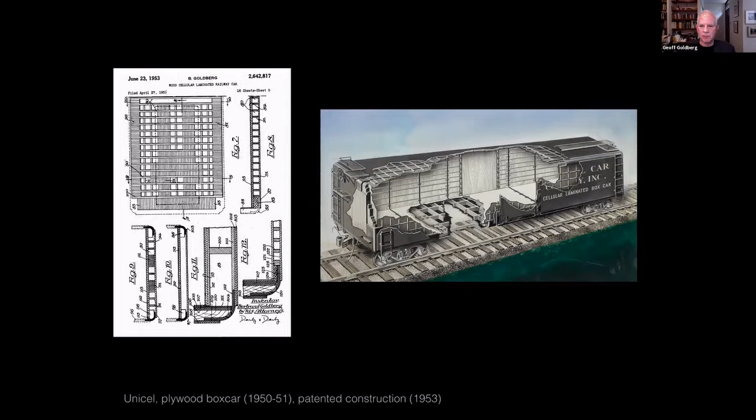So again, there's exploration in technique going on through these furniture experiments, if you will. They were working tools for him.

The first of his three-dimensional curved buildings is a project proposal in 1956 for a recreational center down in Alabama. It's got these kind of doily leaves for roofs, which we did not understand or give much import to until just a few years ago, when more careful looking at the archives revealed the working drawings for this, shown on the bottom.

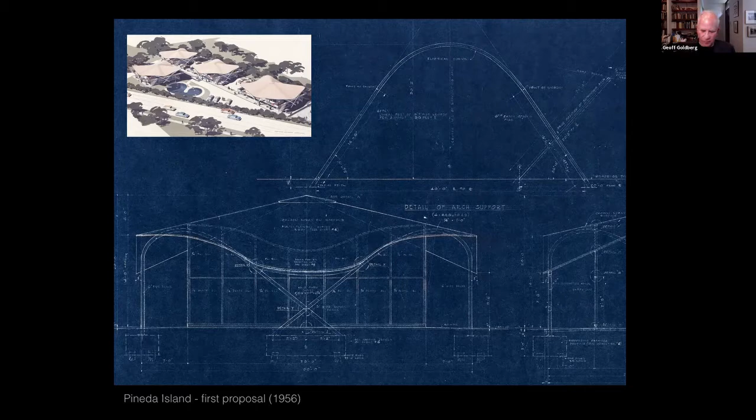You may see, I don't know if you can see clearly, but there's this sort of curved piece you can see on the top one. It's a pipe, a 3-inch pipe. Well, what's that all about? We actually went through it in some detail, and the sequence is shown on the upper left side here.

You take a curved pipe on the ground and you bend it. It's roughly a 7-centimeter pipe. Then you tilt it up at 45 degrees and you stick it in the ground. You do this 4 times, and then you fill it in between them with the red lines in the second drawing. Then you raise a center post and loft, if you will, from that out to the perimeter, and there you get your wobbly doily shape. It's a rather interesting notion.

One of the differences between Europe and America is that we're far more stingy about labor costs. Labor tends to be high cost here, and so he was always interested in how do you get away from handcrafted and industrialize this. You can sort of see that process here. This project did not go ahead.

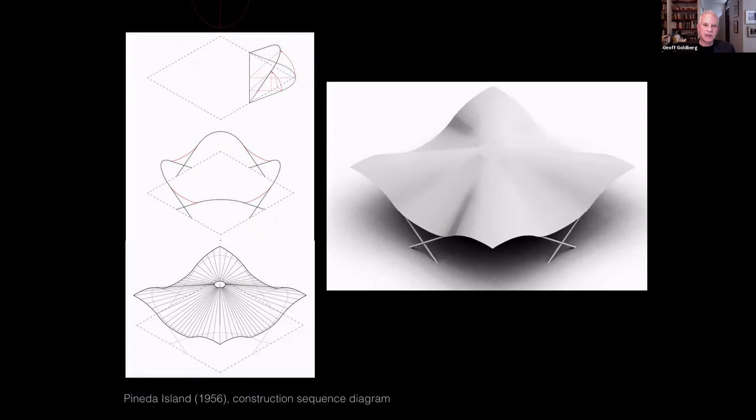The one that ultimately put him on the map was Marina City. Here's the elevation drawing for this. It has a very unusual development history, which is beyond this talk, but I just want to say that his tallest built work before this was a 3-story house. These are 60-story concrete towers, which were the tallest in the world at the time they were built. He had no right, if you will, to this commission. He managed to tumble forward in a very unusual way. That's a story for itself.

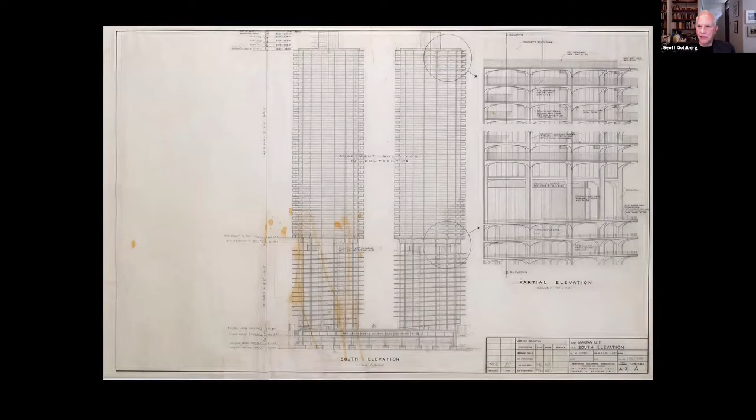I want to talk about a detail in Marina City, in fact, a few details, which has to do with this perimeter column. People have a very hard time understanding Marina City because it is technically innovative, iconographically unusual, sculptural, and yet also functional. It's a very strange combination, and it's not easy to get a handle on.

One of the problems people have is addressing the resolution of Marina City, and part of it is the fine grain—that kind of Mies approach. We're either doing the big box or doing the corner detail, so it doesn't work at the middle scale. It's in the detail. Here is a detail of one of the perimeter columns. It is under the parking ramps, and if you'll notice, that's a rather unusual shape. It's actually a very provocative shape.

A few years ago, I started to look into this a little bit more in detail. The balconies shown on the left here during construction, without their railings, are actually quite large, and they have these side haunches as the perimeter beams come down to meet the column. You can see it in the drawing on the bottom right. This is not a working drawing, it's actually a structural diagram on the top showing what's going on at the column. You'll notice the column shape is unusual—it's a trapezoid with its ends cut off, so it's an 8-sided column, if you will.

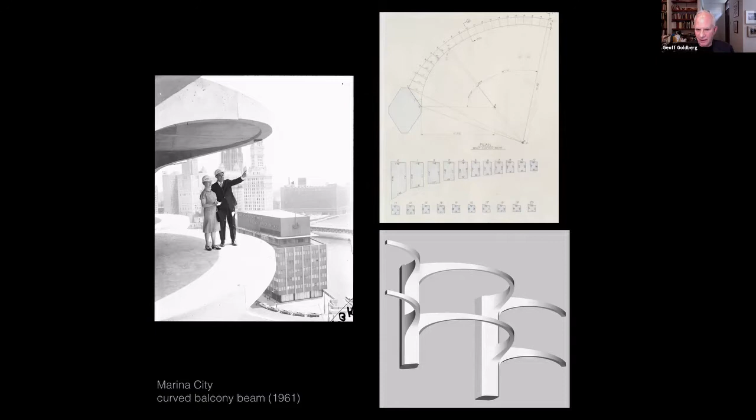If you start to investigate that column more, there's a few things that are interesting. First, how could such an unusual shape be economical? Marina City was built at the cost of public housing, which is staggering, so the question is, how could you possibly do something this custom? Under this notion of mass customization, back in 1960, they developed a fiberglass form, which they reused. There are 18 of these columns per floor, times 60 floors, times 2 buildings, so they were able to get their use out of them.

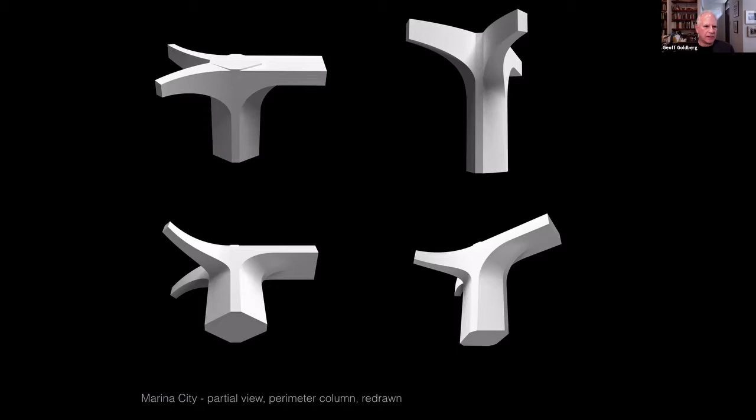Between the two balconies, there's a flat face in the upper right. In the bottom right, you'll see that internal flare within the apartment as it returns to become a structural beam that goes back to the core. It's a very unusual shape, and it's been pulled out of the building, if you will, to look at it on its own.

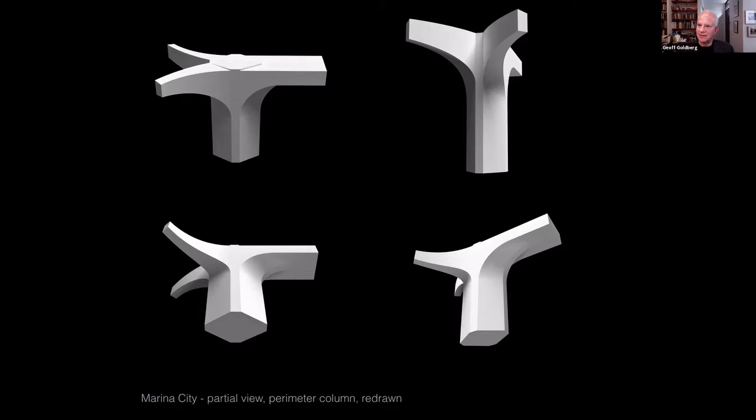This got me thinking, where does this come from? This is not Mies. This is not easily predicted from any part of his experience. How do you get to this? That's an interesting question, at least I thought it was.

How did he get to this? And of course, he's not here anymore. He's been dead for 25 years, so it's hard to ask him. And I started poking around a little bit further.

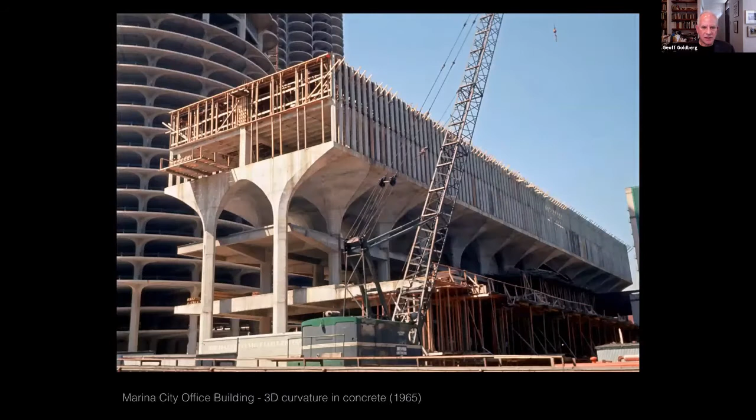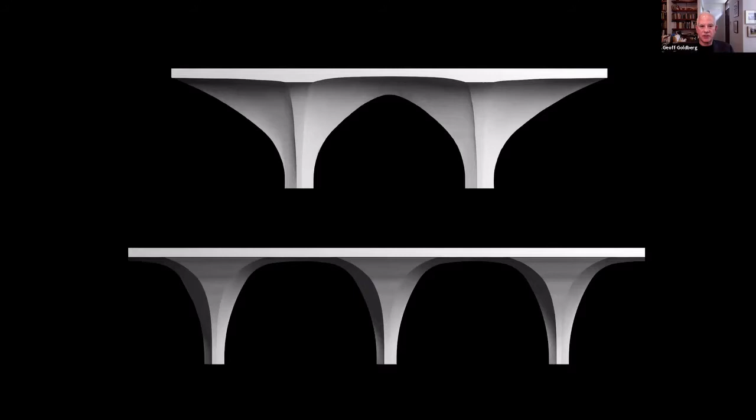So we decided to try to understand how they had been drawn and how they had been engineered. We developed a very complicated three-dimensional model of them and found that the sections between north and south and east and west are in fact quite different, not just a simple set of relationships. We made a physical model, and this is a Rhino version of it, upside down, but you can see that roofscape is really quite complicated.

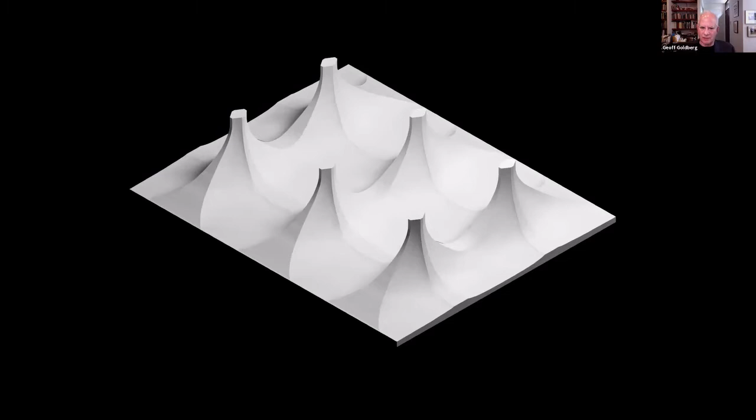And it starts, of course, with, well, why don't we take that trapezoidal column and use it over here? And why don't we just flare up? Well, of course, the geometry off that trapezoidal column is actually quite complicated. If you go back to the drawings and look, both sets of sections are what I call tri-arch radiuses - an engineering approach where you use three different radii to approximate the curve. It's a very complex curve.

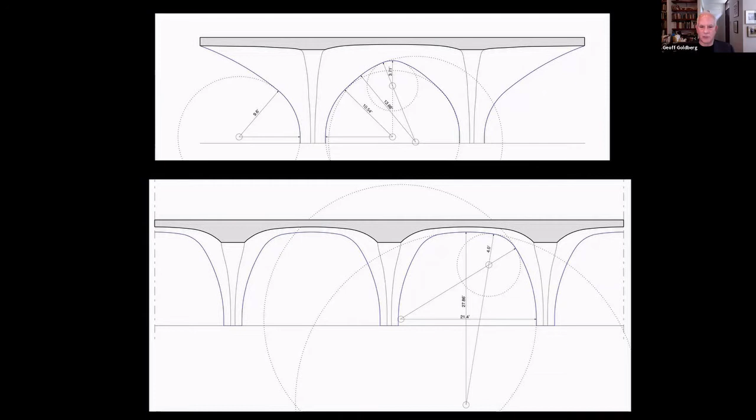In a sense, at the end of the day, these are Gothic. These are not industrial. These are an effort to make in concrete what was being made with stone and lath in a Gothic cathedral. I think that's kind of curious, while he's working on an industrial project, to have this kind of comment.

The next project I wanted to bring up is the Brenneman School, where these concrete shells were done. It's designed around the same time as Marina City. And unlike Candela's work or other work dealing with shells, these are intimately scaled - one per classroom. The idea here was to get north light through the clerestory and be able to stack these up close to each other so you could get 24 classrooms on one floor.

And still have light, even though you couldn't have side-to-side light. There were issues with these. They did them sort of as a monolithic pour. I think there were cracks, there were leaks. The whole thing has been covered in a big steel box, so you can't actually see them unless you manage to go up into it. But they're really quite interesting when you look at their history.

Well, what's going on is that those are 1.5 inch, or what we might call 4 centimeter, steel channels that are bent, much like that pipe we saw before. And they span from one side to the other, and then reinforcing is put between them, and then mesh is put over that, and then it is sprayed. So these are not handcrafted with molds in the same way that you might see it like a Candela project.

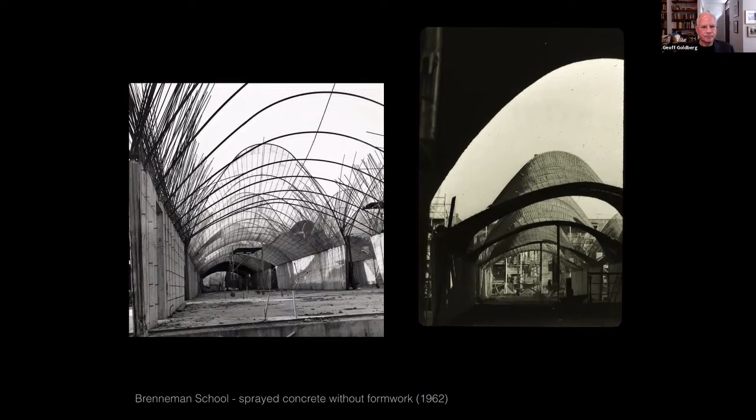Going deep into the drawings, there's always been a mystery about this project, because my father in his oral history always refers to it as kind of an arch-like construction. If you go back and look at this, I can't understand this arch-like notion. It makes no sense—these are shells. Well, it turns out they played a trick here.

They made these individual pieces of channel. There are, I believe, 10 of them, and they are of different sizes. Here's the whole progression of them, placed roughly 4 feet, or a meter 20, apart from each other. And they are serving as arches.

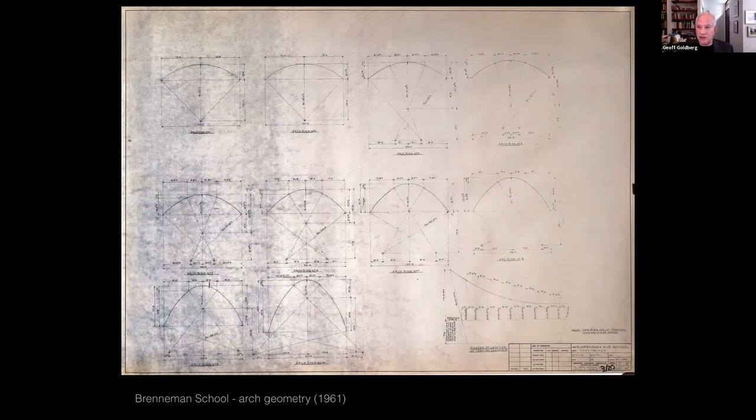If you go deep into the papers, you find out they actually calculated it as a hyperbolic paraboloid, and then they also drew it as these arches approximating that. So the construction side dominated over the pure form, even though they're very close—there's like 1 or 2 inches difference, a very little difference. So that's kind of interesting. And here it is—if you model it, this is what they're doing with these arches.

So now this is our third technique. We had the doily, if you will, from Pineda Island. We had the sort of Gothic. We had also the columns at Marina City, and now we have this one with these arches. So already we're seeing a nimbleness about construction and about techne.

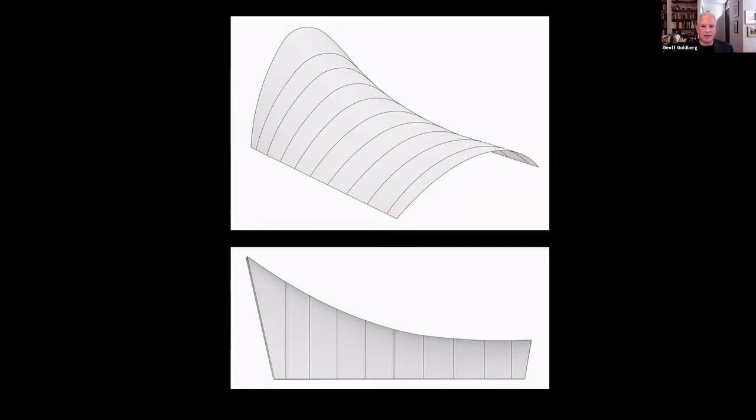The last of the three-dimensional curve approaches in buildings I want to draw attention to is the ultimate solution where the office went, which is they got out of these complex curves and into something called blockouts—they would take an extruded shape and block out, making openings into it. These are geometrically complicated because they're curved in a bunch of ways, but they're very easy to make, quite simple. You just have your wall form and you block out a certain section of it, and it makes for very dramatic space.

So this is where the sensibility is beginning to dominate over the notion of technical inventiveness. They found an answer, and ultimately they use this answer in all their subsequent projects.

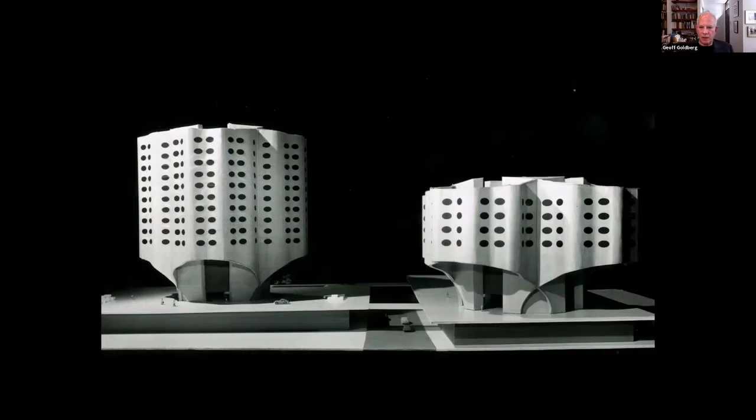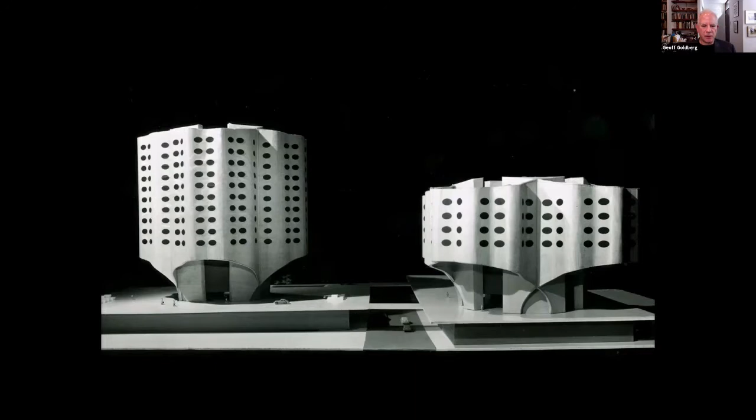The office moves into a number of hospital projects, and this was a proposal for one that did not take place, but the plan form comes from a notion of patient clusters, where the outboard bathrooms make the kind of bumps in the exterior wall. So it's kind of a shell structure up above, but notice the way it comes down to the ground—it is essentially blocked out. They just take the extrusion and delete a whole bunch of it and tie it back to a central core. And they used this approach in many different hospitals.

These are different layouts that they did. You'll notice, for example, in the upper right, the Brigham and Women's, you can see the way in which the patient cluster is divided up into bedrooms. In each one of these, actually, you can see the bedrooms.

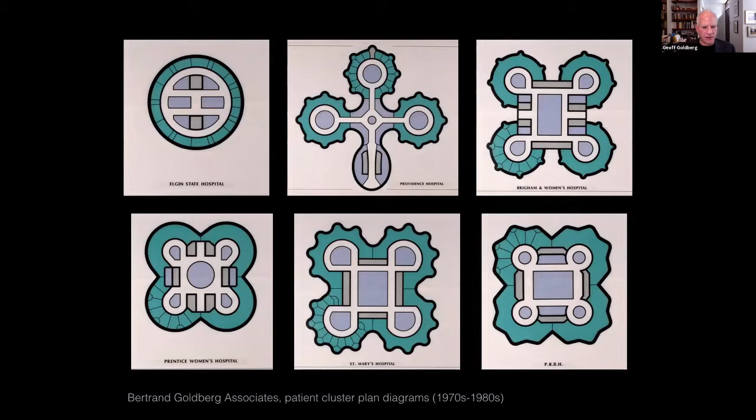And I want to draw our attention to Prentice on the bottom left, which is here. You can see the same approach to the blockouts. In fact, this is the only one that purely got this heavy cantilever in place. The structure is a shell hybrid, because there's actually some very tricky structural work going on interior-wise.

To do, and it's very, very nervy.

Here is the last hospital they did in Alabama, and I show it in construction. Again, it's an extruded shape that's going up, but there's several things that are interesting about this.

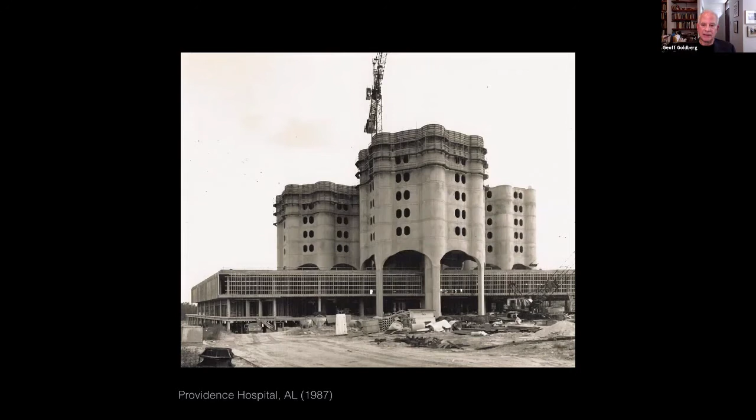First, that perimeter wall turns into columns. And as we look at this more closely, we'll find that perimeter wall actually has different thicknesses. So it's a shell that's columns that turn into a shell, right? This is rather complicated construction.

And you're getting some very interesting three-dimensional aspects in this. Here's some working styrofoam models from the office about how to figure this out. You can see the blockout notion on the upper two images, which is really you have a curved wall and you just have a solid that blocks it out. So you can see the tricks they're up to about how they make sculptural shapes out of simplified construction.

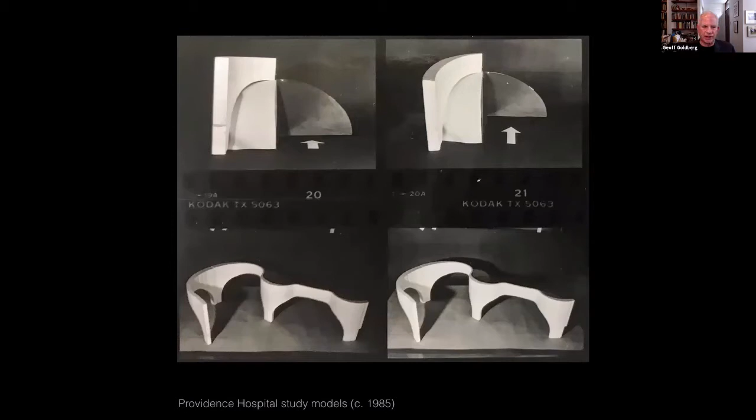Well, the question is still on the table: where did this stuff come from? We can have discussions about modular versus the universal space of Mies, or we can have discussions about the inventiveness of the construction. But I think there's another place to go, and it's a rather unusual place.

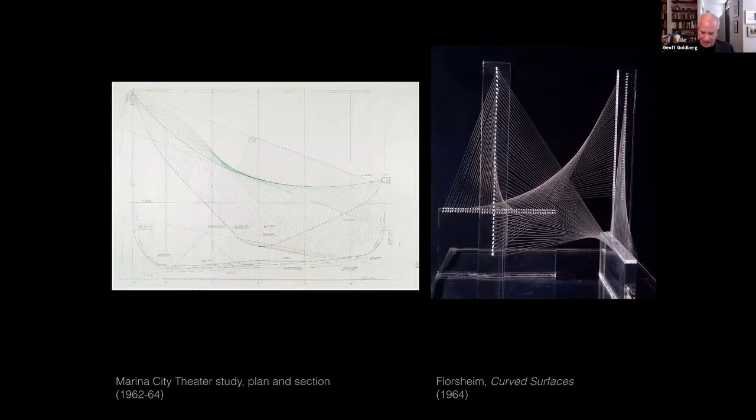So I decided to dig a little bit deeper. Here's a later piece of hers in string. You can start to see that she's beginning to explore the relationship between geometries and surfaces.

She gets out of the three-dimensional curved shapes around the same time as my father moves to the blockouts in his work and simplified extrusions, meaning that they got out of this very difficult and customized sense of three-dimensional form, and they start getting into other issues.

And lastly, she moved into these very large, what we might even call architectonic pieces. The column on the left is about 6 to 7 feet high.

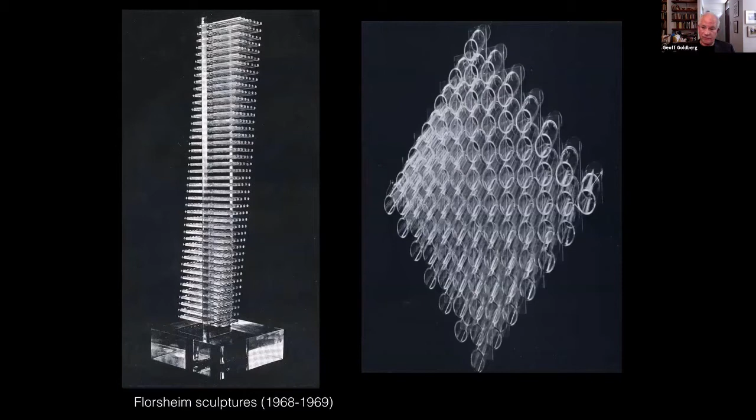Okay, so if we go back to Vitruvius and we talk about firmness, commodity, and delight—if we take delight and call that form for the sake of discussion, and if we think about firmness as tectonic, how is it made, structure and its construction, and commodity is its use and its social program, a full analysis of my father's work would require all three of these to be discussed. But today we're only really talking about form, and to a certain extent the tectonic aspects.

In this discussion, I'd like to propose that form stands outside of time. It aligns with geometry, it aligns with technique, it even has ideals, but let's consider it atemporally. So let's assume that this is not an issue of history, this is an issue of ideas.

With that in mind, I plunge us right back into history because I want to start with the Bauhaus and where my father went. As you may know your Bauhaus history, it had three different directors and three different locations, and they didn't overlap all at the same time. So it's delightfully confusing, but at least we can look at Dessau by Gropius and understand the Bauhaus structure.

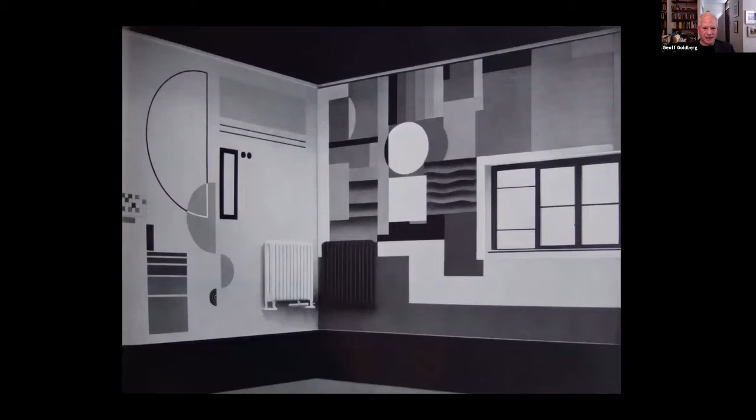I show you this because it's, in a sense, almost a commentary on Lissitzky's work about corners, where you have a graphic and a physical construction that are in dialogue with each other. And I show you this because I want to say that at the Bauhaus, everything's up for discussion.

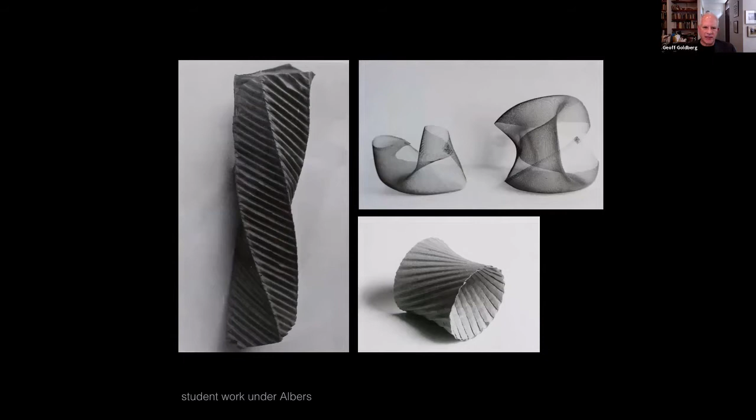I want to point out that this caption of Goldberg under Albers is not correct—I apologize. These are student works under Albers at the Bauhaus where they're dealing with paper, dealing with an understanding of the material structure of the paper and how to make form out of that. They also dealt, either in Germany or in the States, with distorting material to make form. I think this is very key to understanding my father's work—there's several things he learned from Albers.

These are some drawings of my father's at the Bauhaus. The bottles in space—there's nothing terribly unique about that. I like the weaving and the barbed wire because of that notion of 2D and 3D.

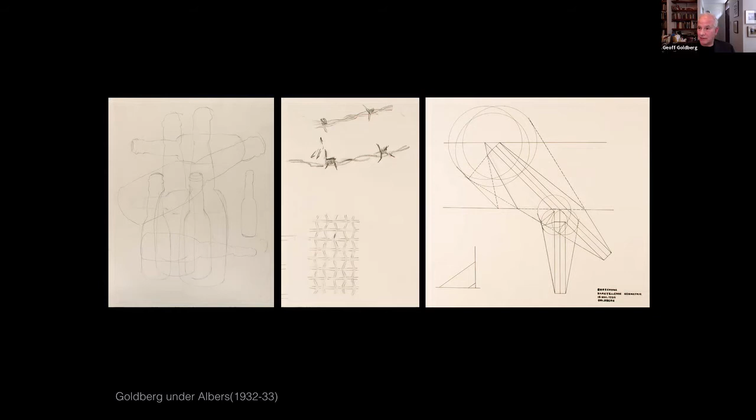And simple geometry sketches. Now, mind you, he's 18 to 20 years old at the time, so I don't think anything massively significant is going to come out of his work there.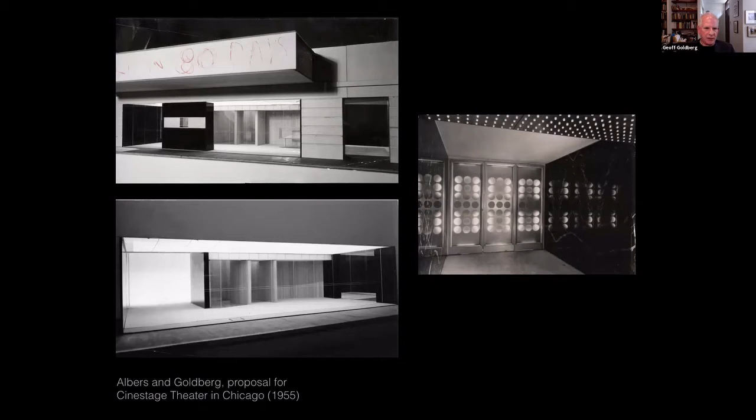He actually collaborated with Albers on a project. The information is very murky on this, but I believe the models on the left are likely Albers designs - they have a subtlety that is, I think, a bit more than my father's. The one on the right is what actually got made, and he always attributed the door pattern to Albers. So I think they lost the project on the left and did something more straightforward on the right.

So then the question is, past Albers and past Lilian Florsheim, where else was Goldberg getting his ideas, and where else was Lilian getting her ideas?

I saw her again when she was 99, and she was just as formidable at that age as she was when I was younger. She was very close to a number of the artists of that time, but she was also quite cognizant of the heritage of abstract art in France and in Europe.

And she did a show on Abstraction-Création, a group established in Paris in 1931, existing until '35 or '36, doing a number of publications.

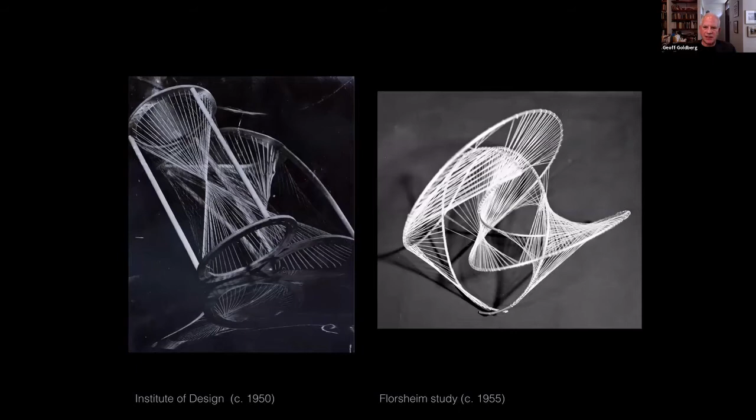In addition to this, I think another member that you would bring into this, what I call the Collegium, would be from the English side of things, where you have Nicholson, Moore, and Hepworth, all of which were represented in my grandmother's house. But I think Hepworth has actually an interesting role here to play.

And it's a different version than Vantongerloo. It's quite interesting to look at.

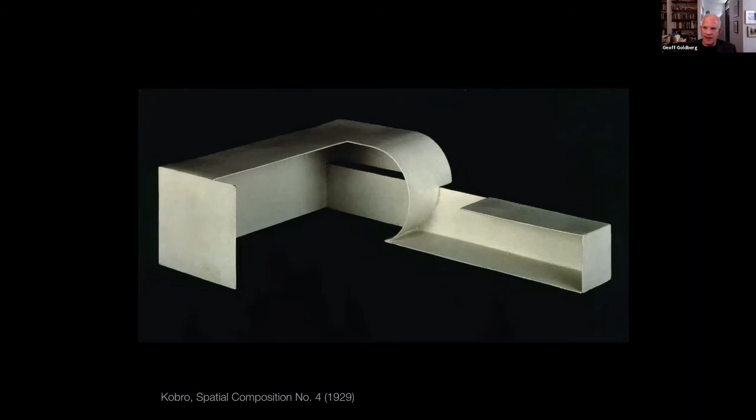What she's interested in is something called unism, which concerns space, how the piece expands from its internal spatial aspects to the space outside. There's a whole notion about how the viewer moves to engage the piece and constructs a spatiality outside of the piece. It's quite murky and complicated, but it is incredibly significant.

Here is a piece of hers published in Abstraction Creation, this form piece, sort of a commentary on figural work, not that far apart from Vantongerloo, with whom she was in correspondence. So we start to see linkages between all these players.

And this is one of her most significant, and her last pieces, it's 1933. This is an extremely unusual three-dimensional form.

So I'm proposing this kind of a model. Could you find a theoretical group about form that could inspire and inform our own decisions as we think about this? I'm seeing these not as individuals in time, but rather individuals who represent different ideas.

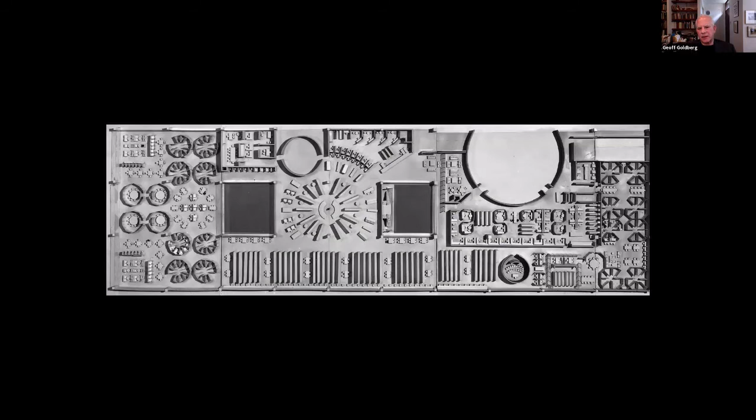So from that, I started to go back and look at his own work. This is a project for a large educational facility, but you can start to see this clearly has a graphic quality to it. There's not much doubt about that.

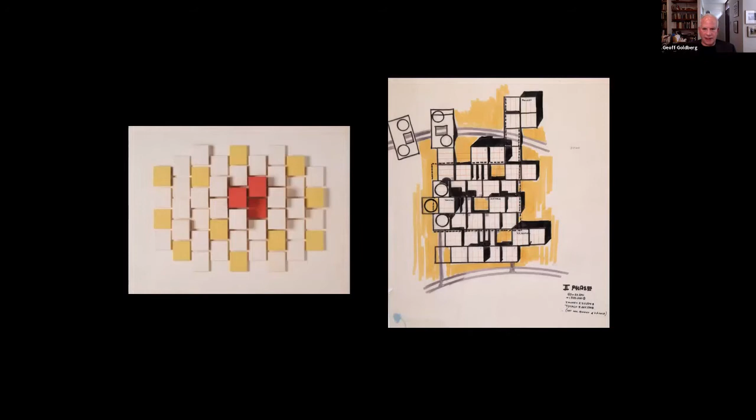Again, this piece of my grandmother's on the left - could it be influencing the thinking on the right? They're thinking about the same things. I don't know that there's a relationship, but, or Albers' notions about how do you make form out of shape.

Bending of the paper, bending of the roofscape. A little bit more personal—this is my father's study.

Well, if you look at it closely, it's that Vantongerloo piece. Now, it's an interesting thing—it's the plaster, because he's interested in how it's made, and he had to wrangle it out of my grandmother to let him take it down to his office.

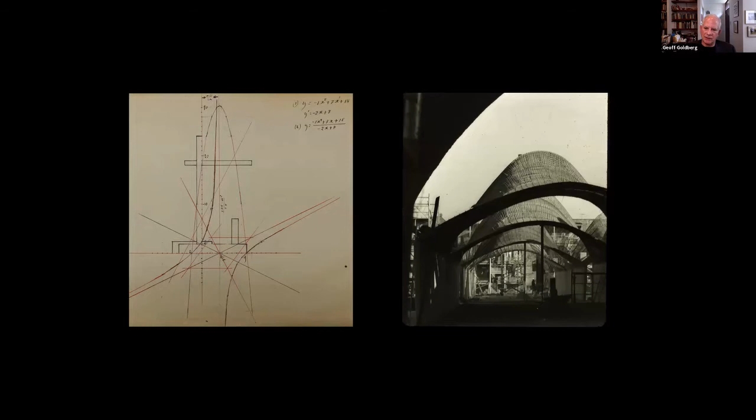The argument here is clearly that, not that the art made the work, but that the art opened up his mind to be able to think outside of the norm.

And finally, this is a piece of my grandmother's on the left, and these incredibly dramatic curves. And this is at Providence Hospital, where that thick wall and those blockouts come together to make some of the most interesting space that he made.

So again, the conversation was about techne to start, kinship, not only with his mother-in-law, but also with what I'm calling this collegium of artists that existed in our world, that I think actually makes a body of work that can be used critically, and the possibilities of influence. Thank you very much.

Wow, thank you. What an incredible story. Really fantastic. You really get into that world and into your world and their world to see this.

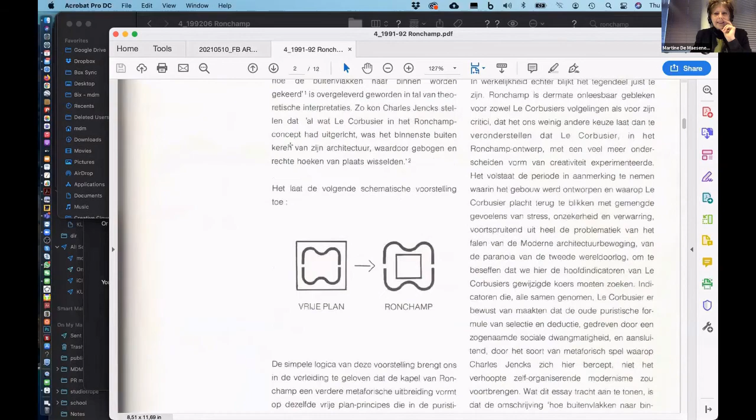Do you see this? Yes, yes, yes, yes. Oh, I'm scrolling to the images.

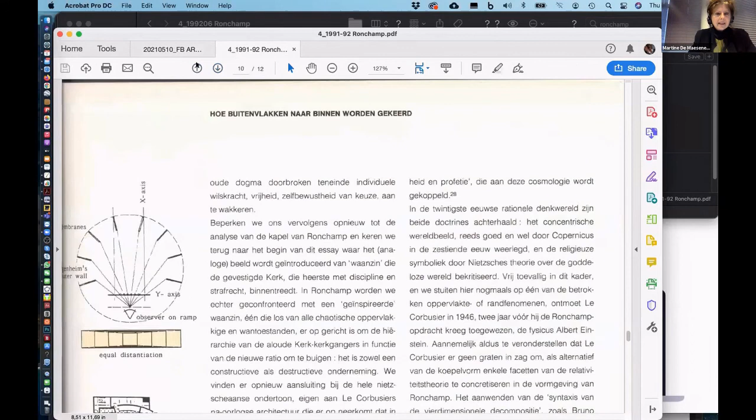No. I first have to make it smaller. But here you see it too, like exactly Ronchamp rebuilt with 7 identical pieces. This is a model by me at the time. Wonders. It's like, you see? Yeah, yeah.

Yeah, I just want to share this. No, thank you. There are 2 core projects that are definitely part of this: Ronchamp is one, and the Philips Pavilion at the Brussels Expo in '58 is the other. When I've taught this material, we look at those very closely. In fact, I had a student who built a 3-dimensional model of the Ronchamp roof, which I will send you.

Because it's a polymorphic form, it reads differently depending on where you see it. It has different configurations. It's an amazing shape.